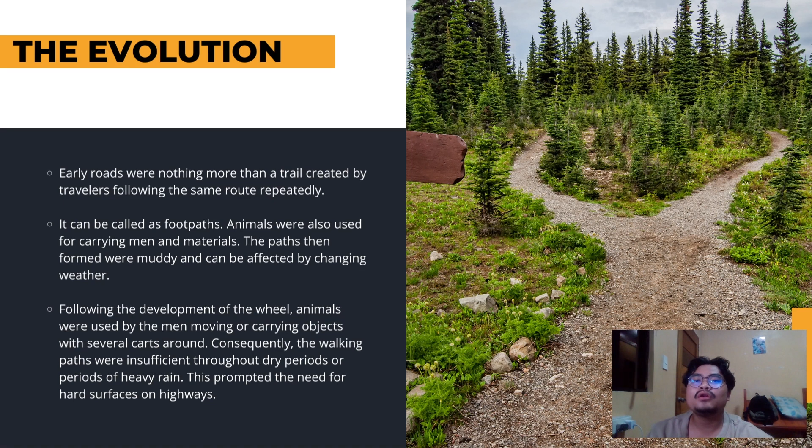With the growth of civilization and increased demand for efficient transportation, innovative solutions were developed to address the limitations of footpaths. Early engineers began laying stones and other sturdy materials to create more stable road surfaces, paving the way for improved travel conditions. These early paved roads allowed for smoother travel, especially during periods of heavy rain or dry weather where footpaths became impassable or dusty. Paving roads represented a significant step in road infrastructure, enabling better connectivity between regions and promoting economic and cultural exchange.

The discovery of hard surface roadways in Mesopotamia in 3500 BC represents a significant advancement in ancient civilizations' infrastructure and transportation systems. The streets of prominent cities like Ur and Uruk were paved with stone, showcasing the remarkable engineering capabilities of the time. This early development of hard surface roads served two crucial purposes, each contributing to the growth and stability of these ancient societies.

One: defense and security. One of the primary purposes of constructing hard surface roads in Mesopotamia was for military defense. The region faced threats and invasion from neighboring tribes and empires, making it vital to establish strong and efficient communication and transportation routes. These hard surface roads allowed for rapid movement of troops and supplies, enabling faster responses to potential threats. Additionally, the well-maintained roads facilitated efficient coordination and deployment of armies, enhancing the overall defense of the ancient civilizations.

Two: trade and commerce. Another critical function of the early road networks in Mesopotamia was to facilitate trade and commerce between nearby settlements, as the cities were centers of economic activity. The hard surface of the roads allowed for smooth movement of goods such as agricultural products, textiles, and pottery between settlements. The roadways contributed to the growth of thriving trade networks, encouraging economic prosperity and cultural exchange in the region. By serving both military and economic purposes, these hard surface roads played a crucial role in the development and stability of ancient Mesopotamian societies.

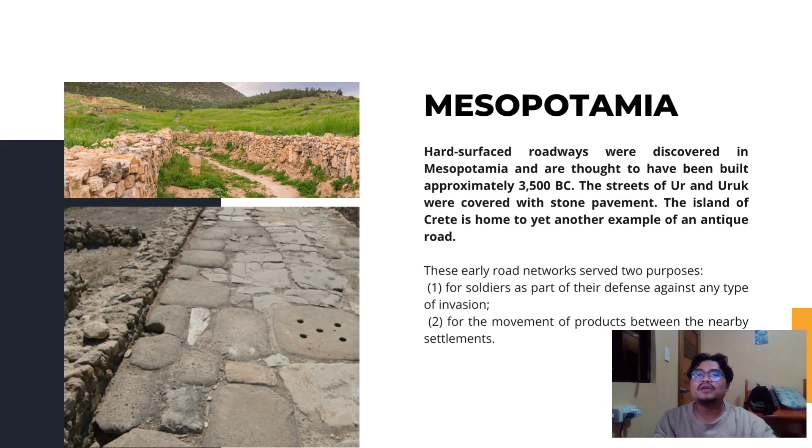The roads not only ensured the safety and security of the cities by enabling swift and thorough responses, but also facilitated the exchange of goods and ideas, fostering connections between different communities.

The Romans' road building achievements are legendary, and they are indeed credited for creating an extensive network of roads that spanned vast distances throughout the empire. This remarkable feat allowed the Roman legions to move swiftly and efficiently across the nation, facilitating military campaigns and aiding in the administration of the empire.

The Roman engineers designed their roads to be as straight as possible, even in the face of challenging terrains like hills and mountains. This design principle allowed their troops to travel with speed and ease, reducing travel time and enhancing military effectiveness. The construction of Roman roads involved a meticulous process that ensured durability and longevity.

The foundation of the roads was built using hard sedimentary rocks, providing a stable base for construction. On top of the foundation, a second layer was prepared using pebbles and crushed stones mixed with dirt to create a compact and solid surface. This layer served as a sub-base and further stabilized the road.

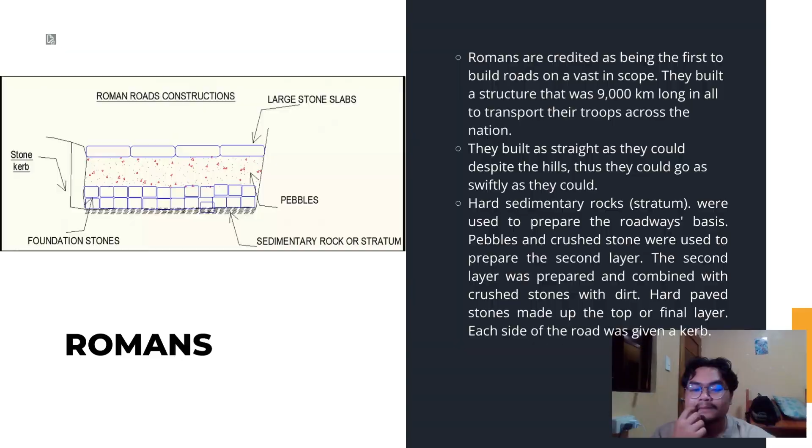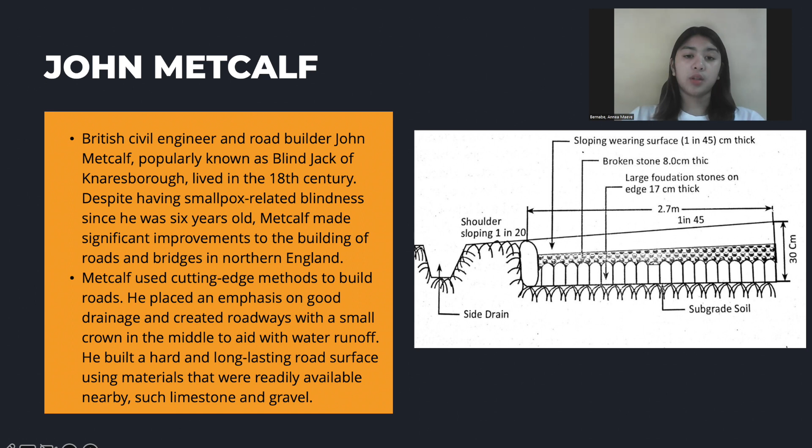John Metcalf, British civil engineer and road builder, popularly known as Blind Jack of Knaresborough, lived in the 18th century. Despite having smallpox-related blindness since he was 6 years old, Metcalf made significant improvements to the building of roads and bridges in northern England.

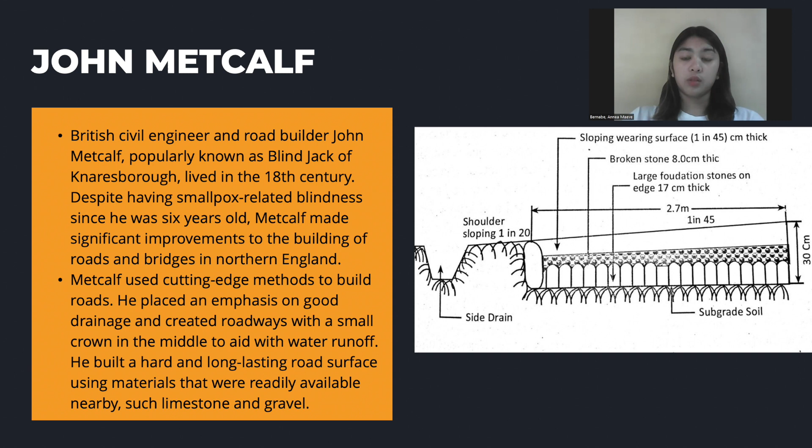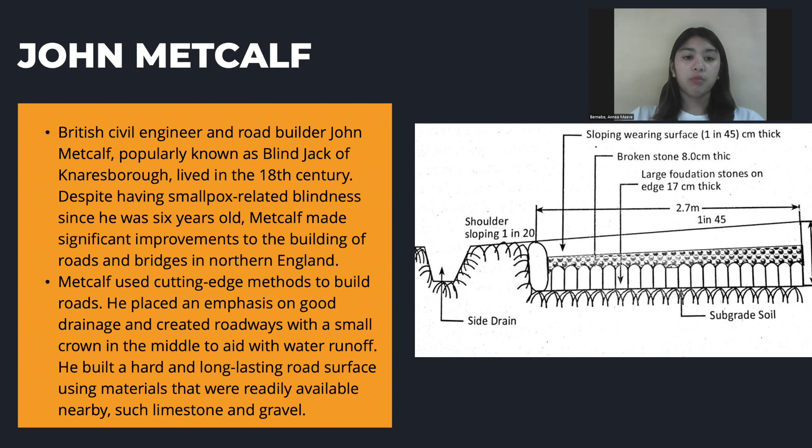Metcalf used cutting-edge methods to build roads. He placed an emphasis on good drainage and created roadways with a small crown in the middle to aid with water runoff. He built a hard and long-lasting road surface using materials that were readily available nearby, such as limestone and gravel.

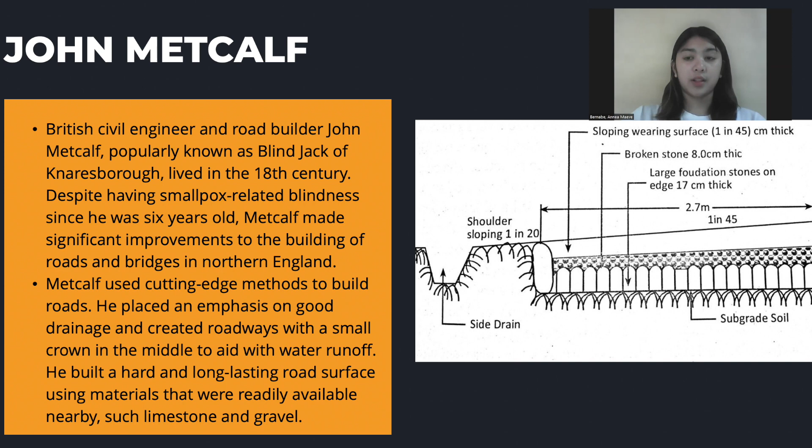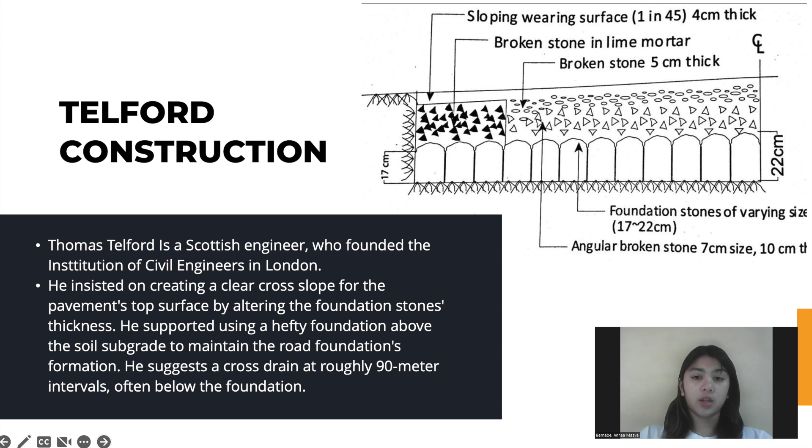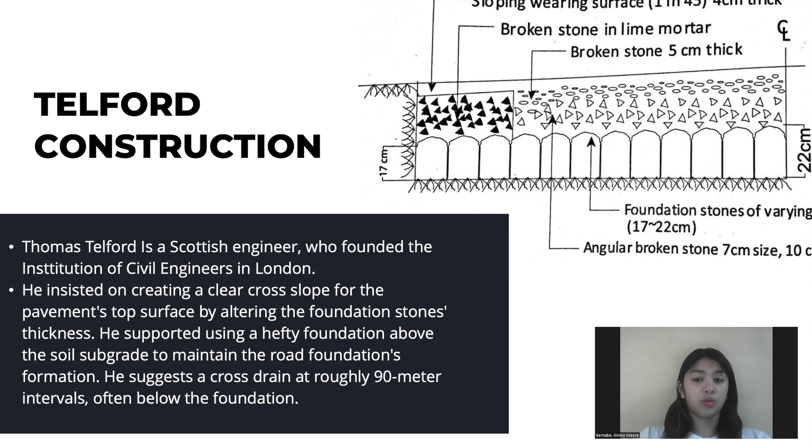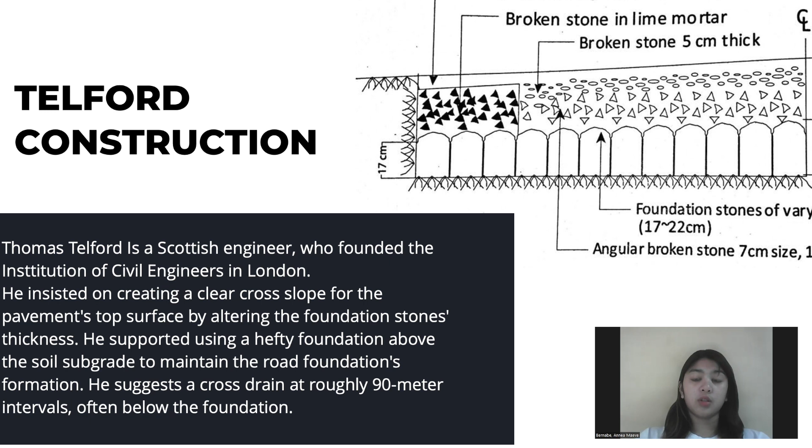Telford Construction. Thomas Telford is a Scottish engineer who founded the Institution of Civil Engineers in London. He insisted on creating a clear cross slope for the pavement's top surface by altering the foundation stones' thickness. He supported using a hefty foundation above the soil subgrade to maintain the road foundation's formation. He suggests a cross drain at roughly 90-meter intervals, often below the foundation.

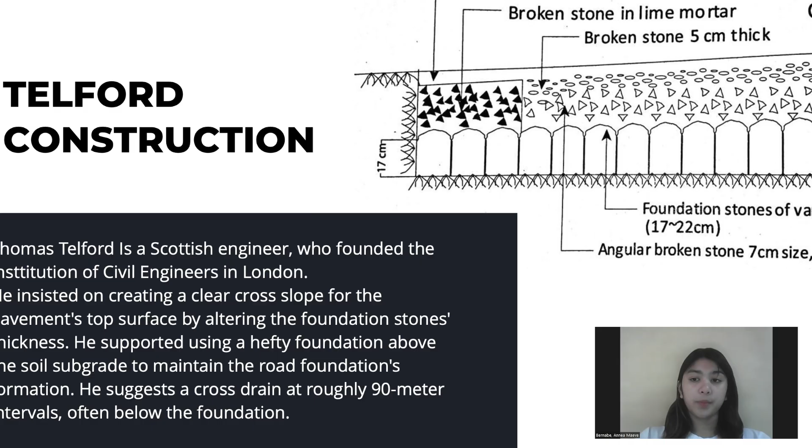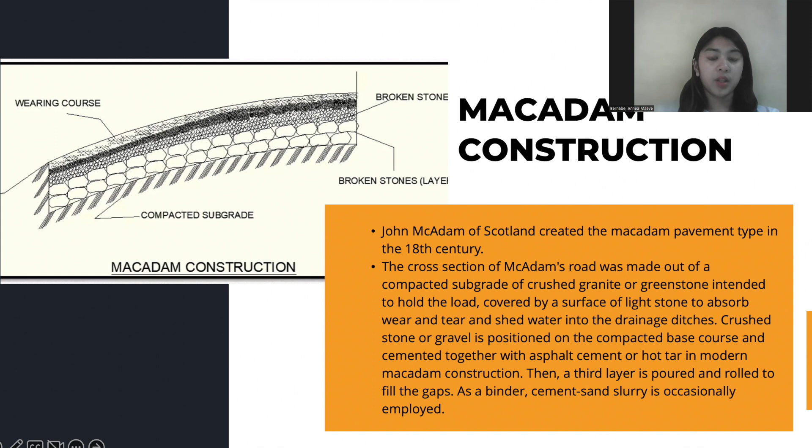Macadam Construction. John McAdam of Scotland created the macadam pavement type in the 18th century. The cross-section of McAdam's road was made out of a compact subgrade of crushed granite or greenstone intended to hold the load, covered by a surface of lightstone to absorb the wear and tear and shed water into the drainage ditches. Crushed stone or gravel is positioned on the compact base course and cemented together with asphalt cement or hot tar in modern macadam construction.

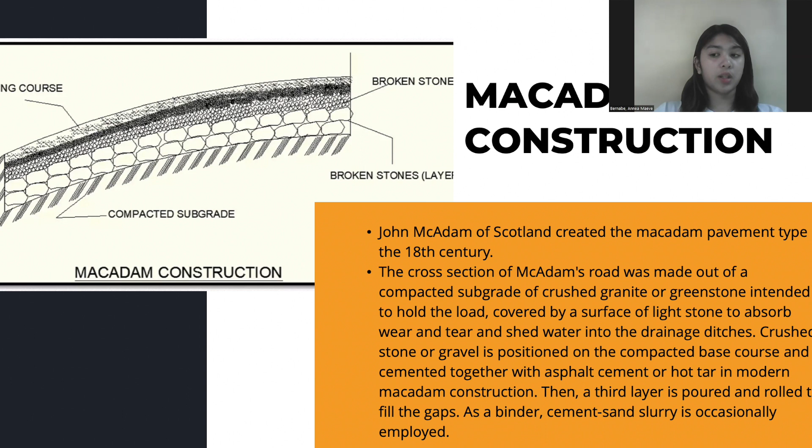Then a third layer is poured and rolled to fill the gaps, and as a binder, cement-sand slurry is occasionally employed.

Asphalt and concrete. With the advent of the automobile in the late 19th and early 20th centuries, the demand for better roads increased. Asphalt and concrete became popular materials for highway construction. Asphalt, a petroleum-based product, was flexible and suitable for various climates. Concrete, made from cement, aggregate, and water, provided a durable and rigid surface.

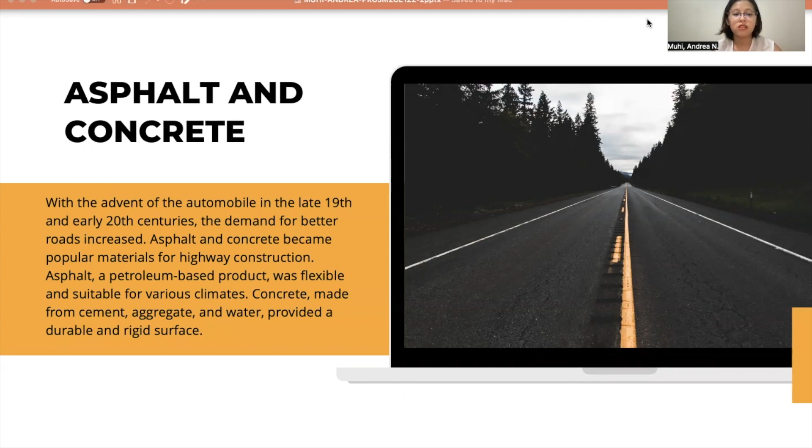The importance of highways. Highways serve as an essential part of the transportation infrastructure and are very important in today's society. Here are some primary arguments supporting the significance of highway roads. First is facilities and economic growth. Highways make it possible for goods and services to be transported, promoting trade and business. They link industrial hubs, ports, airports, and commercial areas, enabling effective transit of supplies, goods, and raw materials. A strong economy supporting sectors, businesses, and supply chains requires reliable roadway networks.

Second is it enhances mobility. People can travel effectively and conveniently thanks to highways. They link urban, rural, and suburban areas, making it possible for people to commute to work, access healthcare and education, and travel to leisure or tourist attractions. Reduced travel times, greater mobility alternatives, and an improvement in quality of life are all benefits of high quality highways with smooth surfaces and enough capacity.

Third is regional and national connectivity. Highways are a crucial part of regional and governmental connectivity. They enable the movement of people and goods over great distances by connecting various states and regions. Highways are vital for transportation because they allow for the integration of various communities and promote social and cultural interaction.

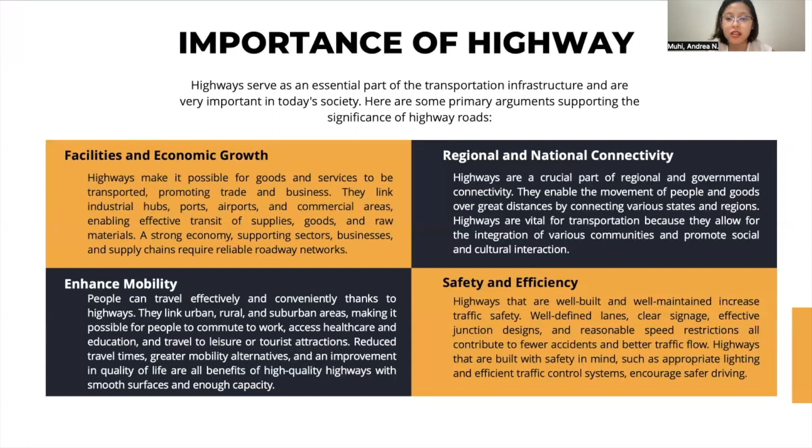And last is it provides safety and efficiency. Highways that are well built and well maintained increase traffic safety. Well defined lanes, clear signage, effective junction designs, and reasonable speed restrictions all contribute to fewer accidents and better traffic flow. Highways that are built with safety in mind, such as appropriate lighting and effective traffic control systems, encourage safer driving.

However, there are challenges in highway construction. First is funding and budget constraints. Highway road building, upkeep, and upgrading all require adequate finance. Budget constraints can prevent projects from being finished on time, cause maintenance to be put off, and worsen the state of the road. For transportation authorities, finding sustainable sources of income while balancing budget priorities is an ongoing challenge.

Second is safety concerns. Highway officials face a serious task in ensuring traffic safety. Accidents and fatalities are influenced by factors such as driver behavior, high speed traffic, poor road layout, and inadequate signage. To reduce dangers and increase highway safety, safety measures must be put into place, such as better road design, effective traffic management, and public education programs.

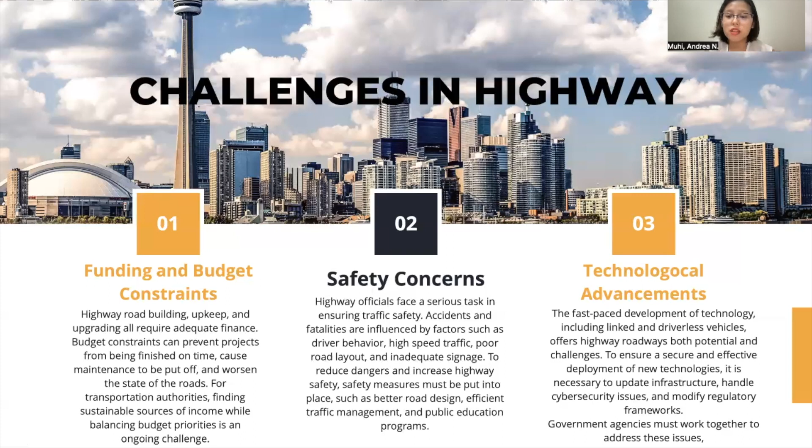And lastly, technological advancement. The fast-paced development of technology, including connected and driverless vehicles, offers highway roads both potential and challenges. To ensure a secure and effective deployment of new technologies, it is necessary to update infrastructure, handle cybersecurity issues, and modify regulatory frameworks. Government agencies must work together to address this issue.